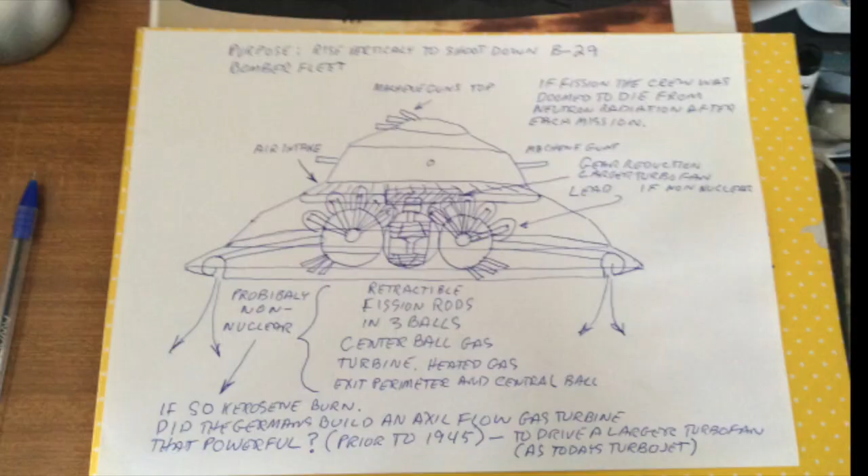We're looking at Gene Watson drawings depicting Nazi fission flying saucers. Here's a Nazi UFO for the purpose of shooting down B-29 bombers. It has retractable fission rods in 3 balls. Center ball gas, turbine heated gas, exit perimeter, and central ball. Probably non-nuclear. If so, kerosene burn.

Did the Germans build an axial flow gas turbine that powerful prior to 1945, to drive a larger turbofan as today's turbojet? If fission, the crew was doomed to die from neutron radiation after each mission. So this would have been a suicide mission flying in this Nazi UFO.

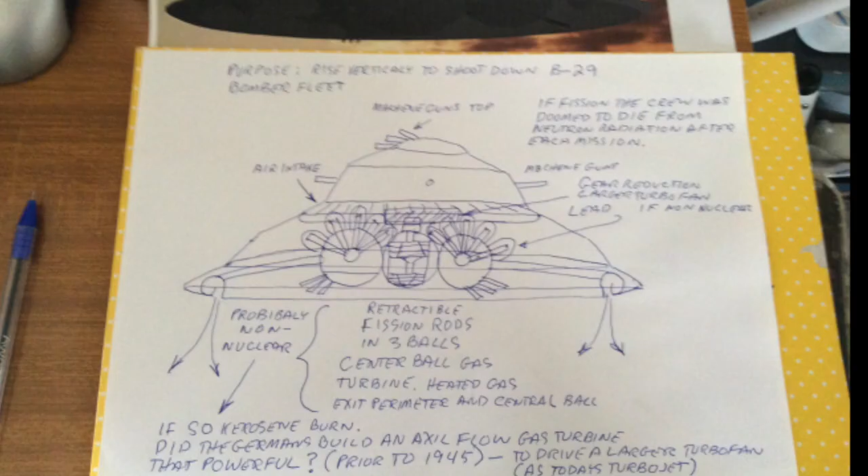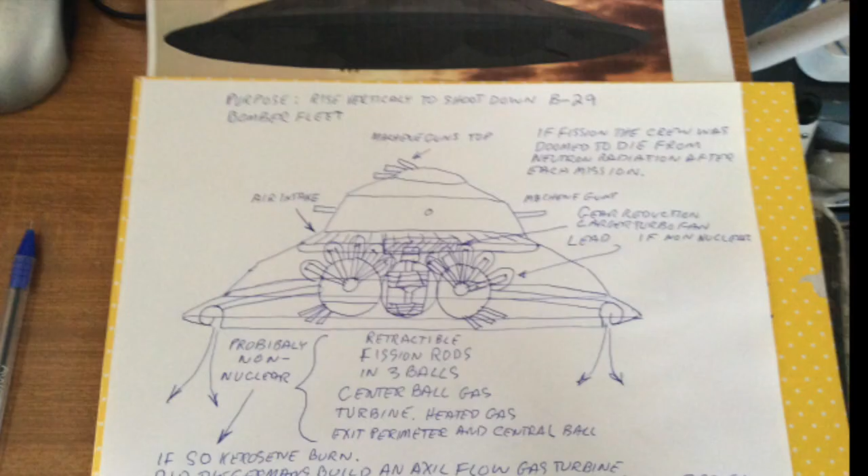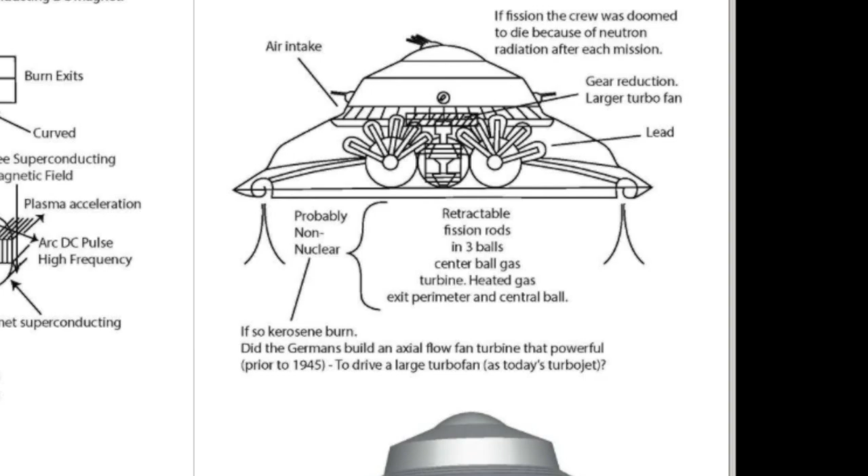Gear reduction, or reduction of gear, larger turbofans, lead - so there'd be lead around the fission rods. Gear reduction, larger turbofan if non-nuclear. So he gives 2 designs to this: one, it could be non-nuclear, like kerosene burn and turbofans, and then the one with the fission rods, like it's a little fission reactor inside the saucer.

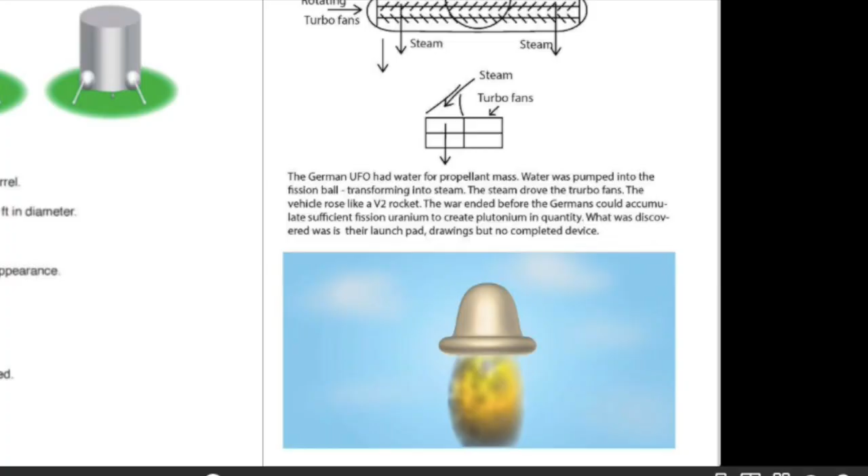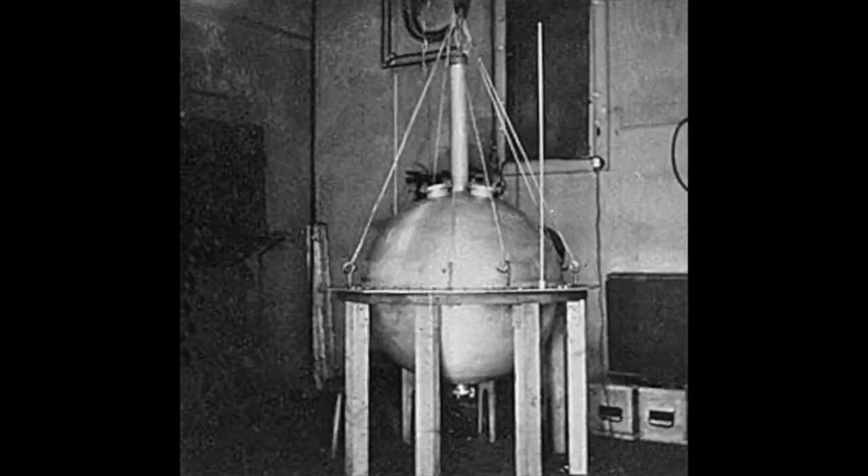The next drawing is the Nazi atomic rocket. It kind of looks like a cone-shaped saucer. How does it work? The nuclear warhead is at the top, water underneath it, then the nuclear fission ball with the rods, air, counter-rotating turbofan, air intake towards the skirt of the cone-shaped saucer. Then the rods heat the water into steam and it shoots downwards. He has a depiction of steam and turbofan going down.

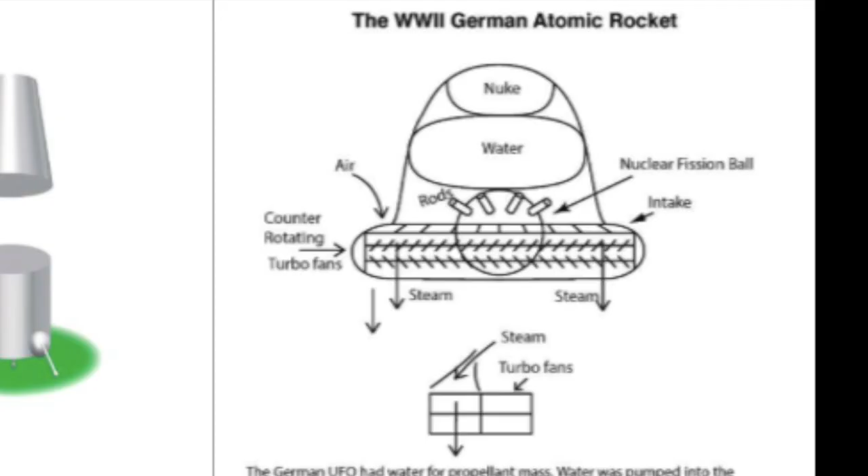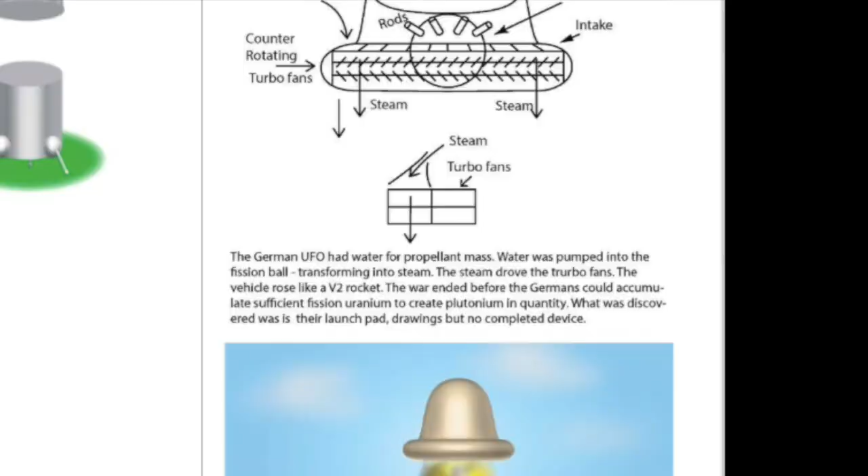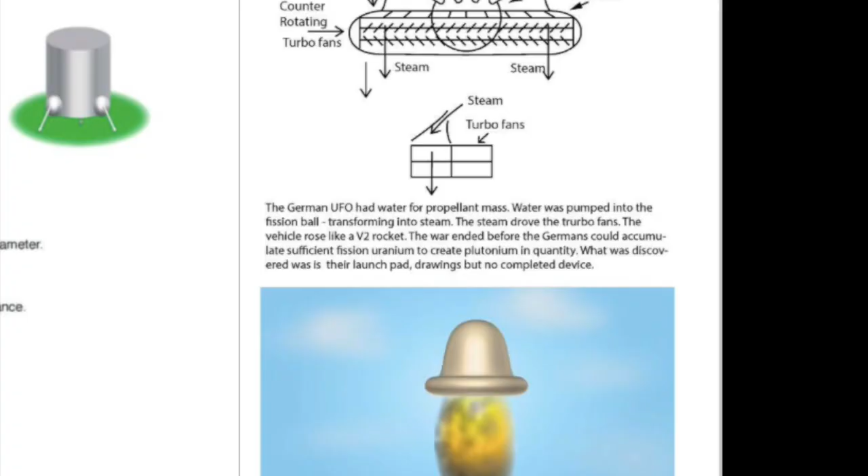Water was pumped into the fission ball, transforming to steam. The steam drove the turbofan. The vehicle rose like a V-2 rocket. The war ended before the Germans could accumulate sufficient fission uranium to produce plutonium in quantity. What was discovered is their launch pad and drawings, but no completed device.

Gene Watson, how he would work is he would see a magazine article, something on TV, see an article about Nazi UFOs, and he could draw the propulsion system. So that's what he did here.

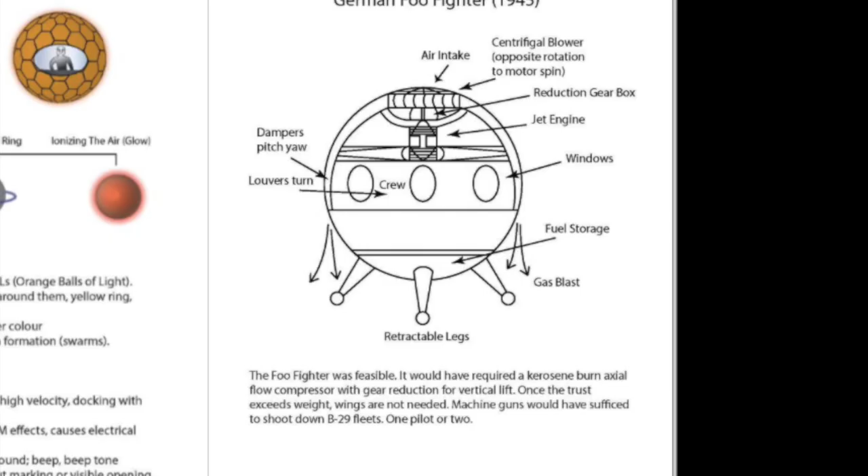The Foo Fighter was the ball-shaped or fireball UFO people used to see during World War II, or I should say American pilots used to see when they were flying over Germany. It would have required a kerosene burn axial flow compressor with gear reduction, planetary gear, whatever you want to call it, for vertical lift. Once the thrust exceeded weight, wings are not needed.

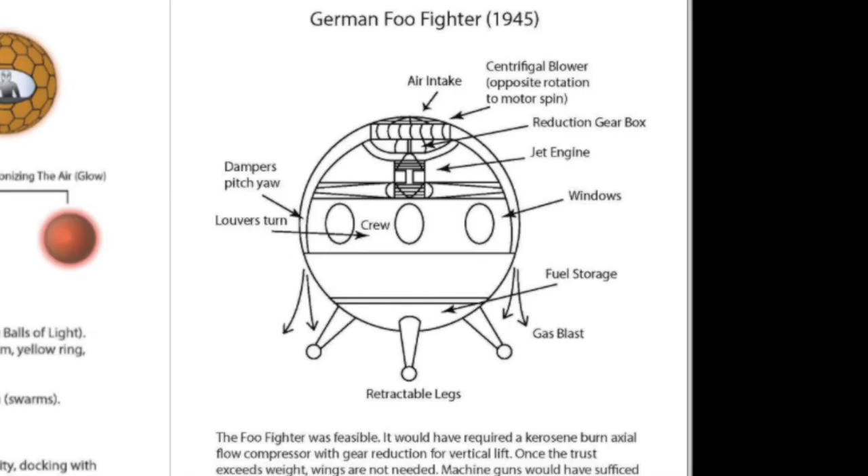Machine guns would have sufficed to shoot down B-29 fleet bombers. 1 pilot or 2 inside the Foo Fighter. The description of the Foo Fighter, the details: you have air intake on the top, centrifugal blower, opposite rotation to motor spin, a reduction gearbox, jet engine, windows, fuel storage towards the bottom portion of the Foo Fighter, gas blasts out, it has retractable legs, tripod configuration, louvers, turn, where the crew is, dampers, pitch, yaw.

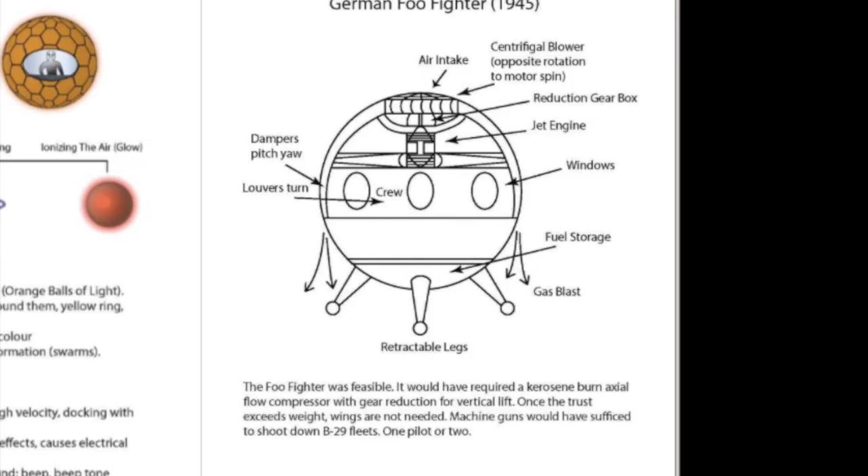Pitch and yaw are aerospace terms for turning a craft in the air. And that's the German Foo Fighter, 1945.